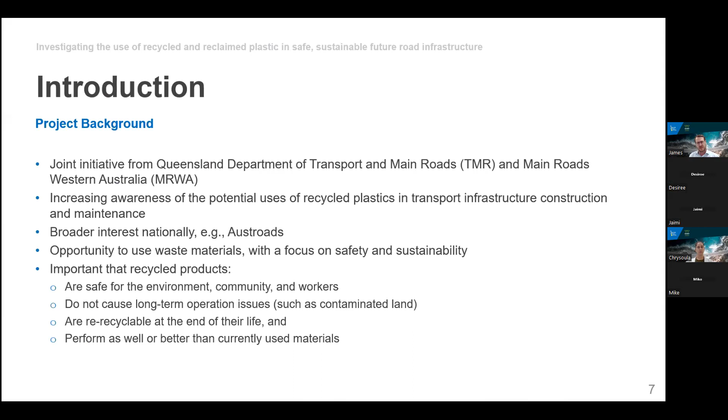Just a quick introduction to this project. As mentioned by Desiree, it's a joint initiative from Queensland Department of Transport and Main Roads Western Australia under the auspices of NACOE and WARRIP. It's to try and increase the awareness of potential uses of recycled plastics in transport infrastructure, construction and maintenance.

It has a broader interest nationally. Many of you will know that Austroads has also been looking at the use of recycled plastics in certain applications. The work is to try and create opportunities to use waste materials, but also to focus on the safety of doing so and also some sustainability aspects.

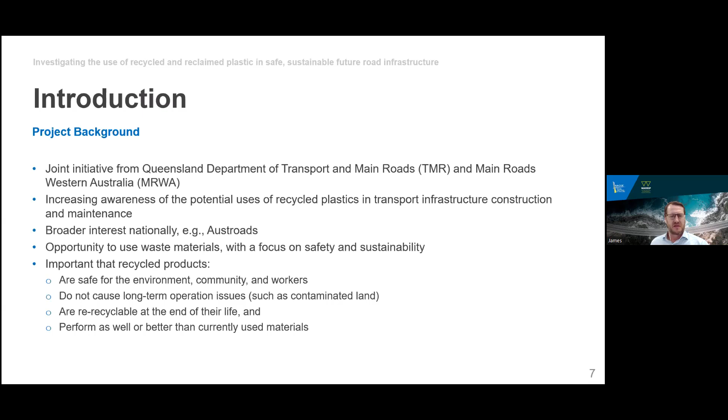And as with all recycled products, it's important that they are safe for the environment, community and workers, do not cause long-term operational issues such as contaminated land, and that they are fully recyclable at the end of their life. They also need to perform at least as well, if not better, than the currently used materials.

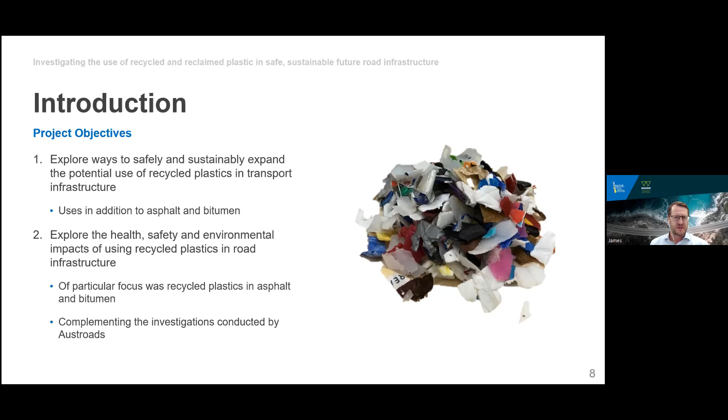So in terms of this particular project, the objectives were to explore ways to safely and sustainably expand the potential use of recycled plastics in transport infrastructure. So it looks at a number of potential applications in addition to asphalt and bitumen, but also touching on that aspect too. It explores the health, safety and environmental impacts of using recycled plastics in road infrastructure, both in standalone applications, but also a particular focus on the use of recycled plastics in asphalt and bitumen. And this work was carried out to complement the investigations that were conducted through the Austroads work.

So what we're presenting today is part of a much larger project. The initial stage 1 was looking at reviewing waste plastics in road infrastructure, where they could be used. It also assessed waste streams in both Western Australia and Queensland and looked a little bit about the recycling and covered a review in terms of desktop from a health, safety and environmental impacts perspective.

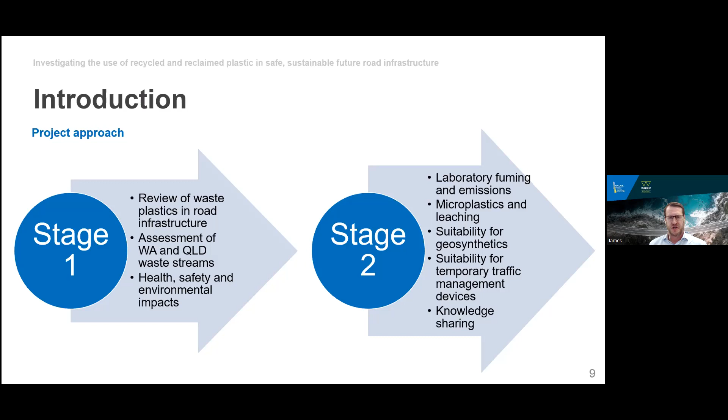We're mainly covering the work that's been carried out in stage 2. So we're talking about covering laboratory fuming and emissions, the potential for generation of microplastics and leaching from recycled plastic modified asphalt, and then also the suitability of recycled plastics for use in geosynthetics and also their use in temporary traffic management devices. And this webinar forms part of the knowledge sharing that is associated with stage 2.

And just one note, due to the size and complexity of the plastic streams in Australia and the potential recycled plastics problem in Australia, no single application for using recycled plastics in road infrastructure is going to make a difference on its own. So we need to consider a number of different applications in our research to make any impact on the annual waste plastic stream. So we're not talking about just utilizing it in recycled plastic modified asphalt, but in any number of different applications. And that little schematic shows that...

So it's a very complex problem, and multiple applications need to be looked at, but also multiple industries need to be involved to tackle the waste plastic problem as a whole.

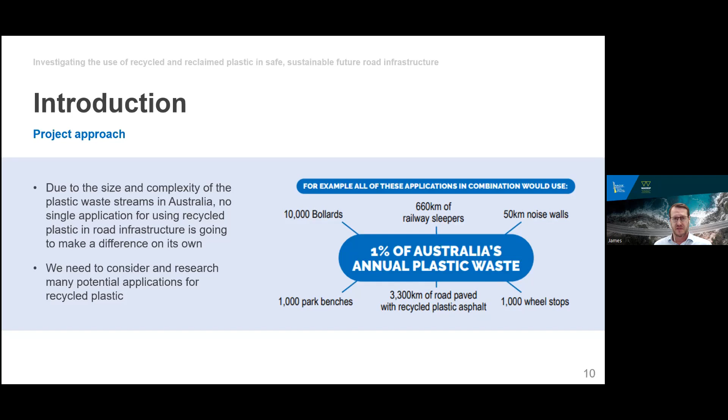The next thing I'm going to talk about is the potential use of recycled waste plastics in geosynthetics. First, a quick introduction to geosynthetics. I'm talking about things like geotextiles for supporting sprayed seals, geogrids for use in pavement structures or embankment structures, and also geonets that could be used in geotechnical applications.

The first thing to note is that there's nothing in the specifications to suggest that recycled plastics can't be used in these applications. As far as we can tell, all of the specifications around these types of products are performance based, so as long as performance and durability requirements are met, there's no reason why recycled plastic products can't be used. The health, safety and environmental risk profile is not expected to differ from virgin plastic products, and a lot of these products already exist on the market containing virgin plastics and are employed on our road networks.

The typical waste plastic streams that some of these products could target are polyethylene terephthalate (PET), polypropylene and high density polyethylene, again dependent on the properties required for the given geosynthetic product. There are some products that already meet current specifications available on the market, presenting potential opportunities for their use in both Western Australia and Queensland. It's also noted that the relevant plastics for the production of these geosynthetics are already being recovered and processed in both WA and Queensland.

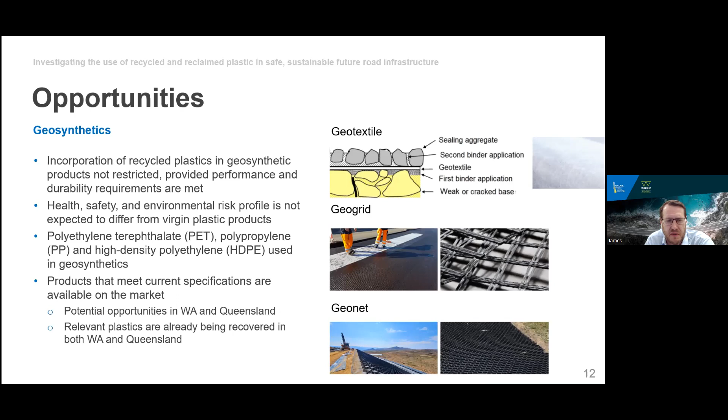Obviously, there are a few barriers at the moment to widespread implementation. I guess the first is production costs. Secondly, making sure that we have a consistent quality of feedstock, and this has been seen as a particular issue in Australia with regards to the maturity of the recycled plastics processing industry in Australia.

So there are a few geosynthetics on the market in Australia, some of which are utilizing Australian recycled plastic. Some of them are currently made overseas. However, it should be noted that a lot of geosynthetic products, even the virgin ones, tend to be imported from overseas at the moment. In terms of performance, the major concern around recycled plastic products is whether they could meet the long-term creep performance requirements in some applications.

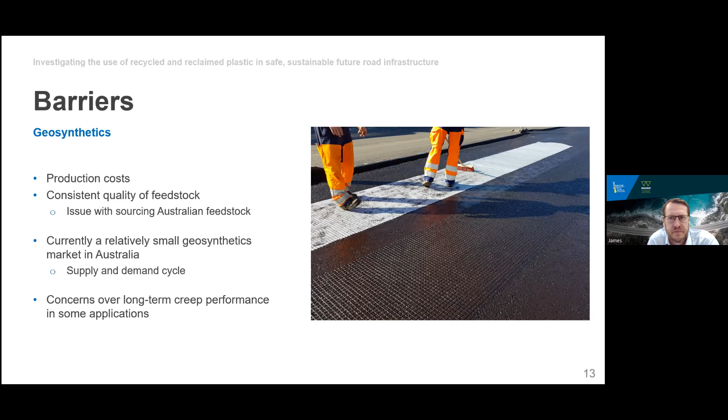The next thing I'm going to talk about is the potential use of recycled waste plastics in temporary traffic management devices.

Again, this provides us with a number of different opportunities for utilizing recycled and waste plastics. There's a number of different temporary traffic management devices that exist containing plastics, such as road cones, barriers, bollards and posts, wheel stops, rumble strips, speed humps. Again, there's a number of different plastic types currently utilized in the typical virgin products, so PVC (polyvinyl chloride), polypropylene again, low density and high density polyethylene.

I've already covered a number of different applications. Again, the health, safety and environmental risk isn't expected to differ much from that of virgin plastic products, so we're considering products that are standalone plastic products where the virgin equivalents are already used.

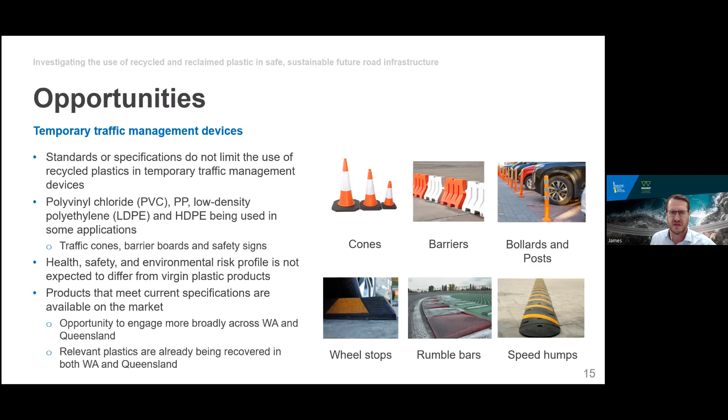Again, there's a few barriers that have been identified. One is the colouring of recycled plastic materials. It's potentially a little bit more complicated to achieve very bright colours, such as bright oranges in traffic bollards or traffic cones. Not impossible, just needs a bit more effort. Again, that requires a good quality of feedstock, and that's just a general comment about processing anything with recycled plastics.

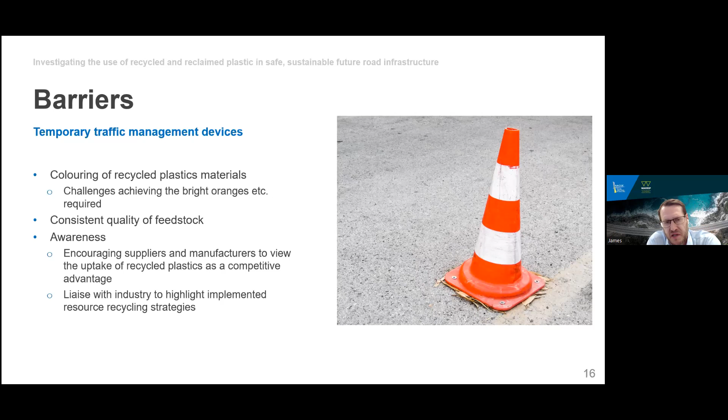It seems one of the barriers to utilizing more recycled plastics in temporary traffic management devices is just awareness that there are products currently being manufactured with certain components of recycled plastics, or even very high percentages, but often people aren't aware they exist. So it's an opportunity to encourage suppliers and manufacturers to potentially use recycled plastics to give themselves a competitive advantage. Then they can market these products to improve uptake, and there are opportunities to liaise with industry.

As introduced earlier, the incorporation of recycled plastics in bitumen and asphalt may also be of interest. Before we recommend their incorporation, we need to understand whether they are safe for operators. We assessed the fumes and emissions in a laboratory environment where concentrations would be greatest, conducting a comparative analysis between bitumen and asphalt containing recycled plastics and commonly used materials, in an enclosed chamber for binders only, and in the laboratory with in-person and static measurements for both binders and asphalt. We then evaluated these measurements against the Safe Work Australia limits and those recommended by the Australian Institute of Occupational Hygienists.

We undertook measurements for volatile organic compounds, polycyclic aromatic hydrocarbons, aldehydes, total suspended particles, and bitumen fumes.

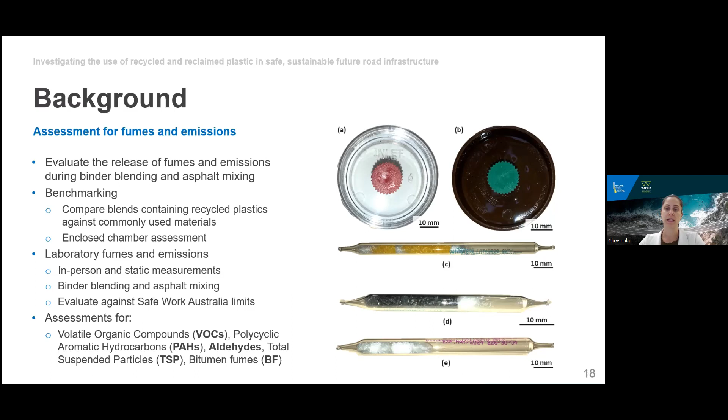For our investigations, we used C170 as the base bitumen, modified with the commonly used EVA and SBS, and two types of recycled plastics: a low-density polyethylene from waste plastic bags, pelletized and sourced from Western Australia, and a commingled plastic of high-density polyethylene and polypropylene in its as-shredded form, sourced from Queensland.

We prepared four blends, plus the unmodified C170, which we then used to compact five slabs via the wet method, and made another two slabs adding the plastics through the dry method.

For simplicity, we discuss the wet method, where additives and modifiers are incorporated during binder blending before mixing with aggregates, and the dry method, where additives are incorporated with the aggregates during asphalt mixing. We recognize a third method, referred to as the hybrid or mixed method, similar to the dry method except the added polymers are expected to melt or soften during processing. The added plastics in this research did not replace any aggregate portion in the asphalt mix. In total, we assessed five materials during blending and seven during asphalt mixing.

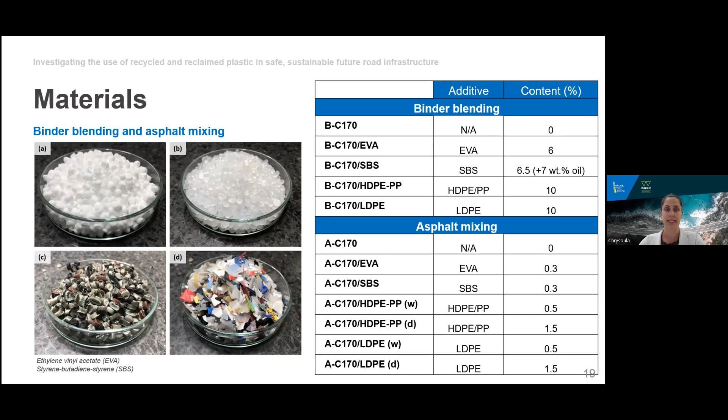Here is the setup for measurements in the enclosed chamber, using a five-neck flask containing 500 grams of material placed in a heating mantle. The temperature was controlled at 180 degrees plus or minus 10, with continuous monitoring via a thermocouple inserted into the bitumen, which was continuously agitated using a low shear mixer.

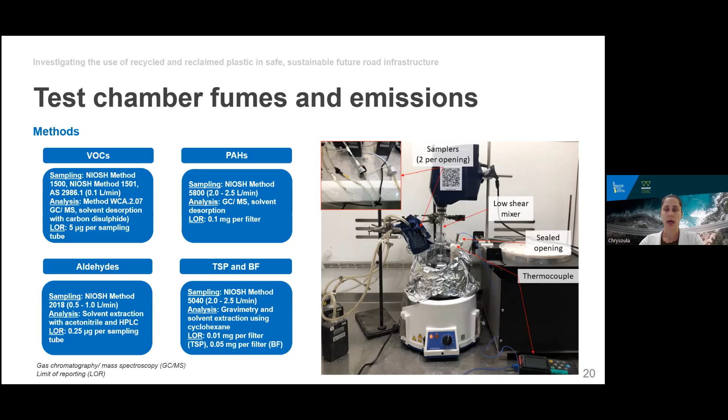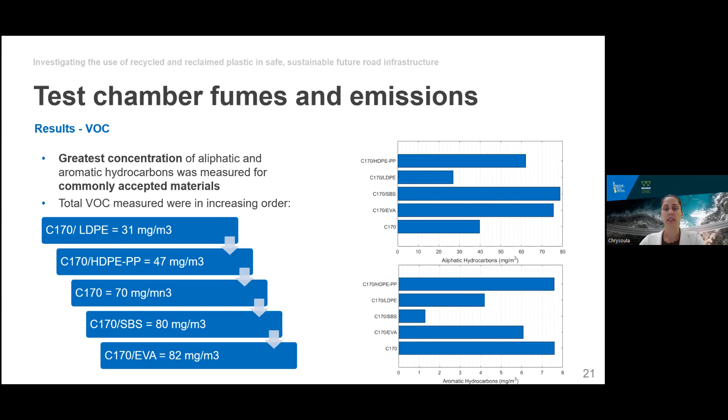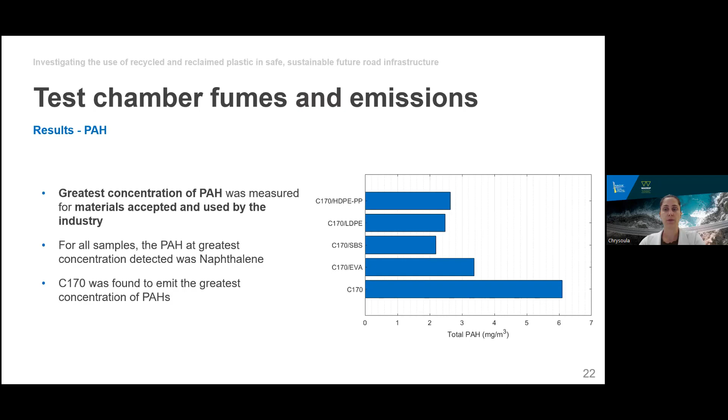For volatile organic compounds, the greatest concentration of both aliphatic and aromatic hydrocarbons was measured for commonly used materials. C170 modified with SBS and EVA emitted the most aliphatic hydrocarbons, while C170 emitted the most aromatic hydrocarbons, marginally more than C170 modified with commingled plastics. In increasing order of total VOC emissions from the enclosed chamber tests, plastics-containing binders emitted the lowest concentrations, while EVA-modified C170 emitted the greatest. C170 and EVA-modified C170 also emitted the greatest concentration of PAHs, with C170 almost double that of EVA. Irrespective of binder, the PAH most detected was naphthalene.

For aldehydes, we detected formaldehydes and acetaldehydes. The greatest concentration of acetaldehydes was from the commonly used EVA-modified C170, while LDPE-modified C170 emitted the greatest concentration of formaldehydes.

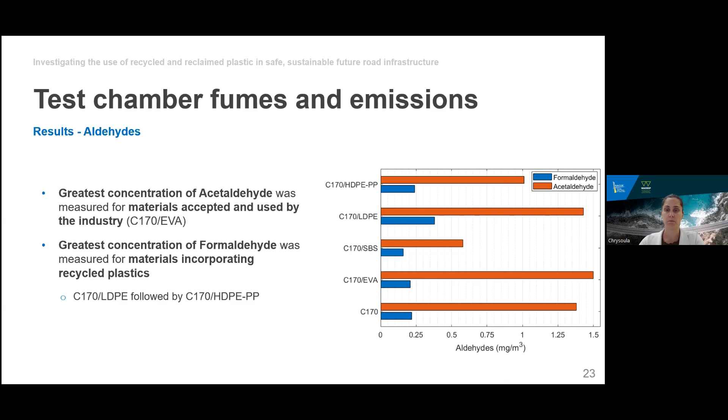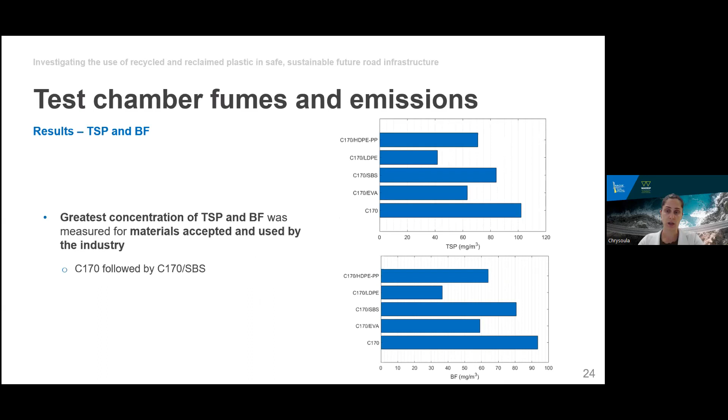C170 was also found to release the greatest concentration of total suspended particles and bitumen fumes, followed in both cases by the SBS modified binder. Overall, emissions from recycled plastics modified C170 at temperatures as high as 180 degrees Celsius were comparable to those of commonly used materials when measured in an enclosed chamber.

The same NIOSH methods were used for the acquisition and analysis of fumes and emissions from binder blending and asphalt mixing activities for the in-person and static measurements. In the photos to the right, you can see the position of the samplers, but in the case of asphalt mixing, the static sampler was moved near the operator's working space around the laboratory.

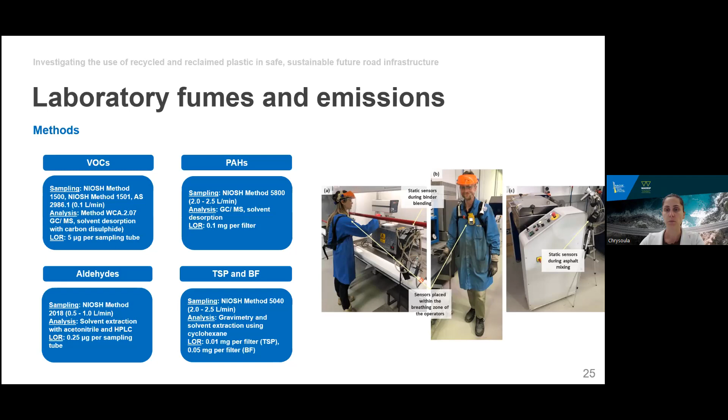In some cases, the VOCs measured by the incorporation of recycled plastics were greater than those of the conventional materials. These were primarily measured during the asphalt mixing activities. For example, the wet mix using the binder modified with HDPE and polypropylene emitted the greatest concentration of aromatic and aliphatic hydrocarbons as measured by both the static and in-person samplers, compared to asphalt mixing using conventional materials.

Importantly, all the total VOCs measurements were significantly below the time-weighted average as recommended by Safe Work Australia. In the worst-case scenario of VOCs emitted during the wet asphalt mixing of HDPE containing binder, the total VOCs were at 0.1% of the Safe Work Australia limit.

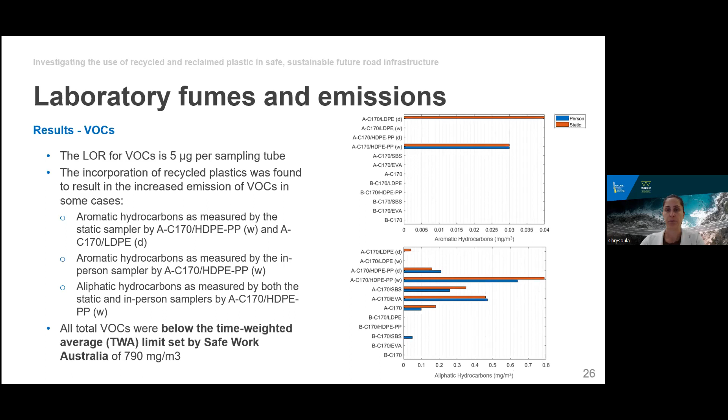In the case of PAHs, the incorporation of recycled plastics was not found to result in the emission of naphthalene or other PAHs at concentrations greater than those emitted by the commonly used materials. Naphthalene is the only PAH for which Safe Work Australia has set an upper exposure limit.

The naphthalene emission of EVA modified binder, which was found to emit the greatest amount according to the static sampler, was found to be 0.08% of the set limit by Safe Work Australia.

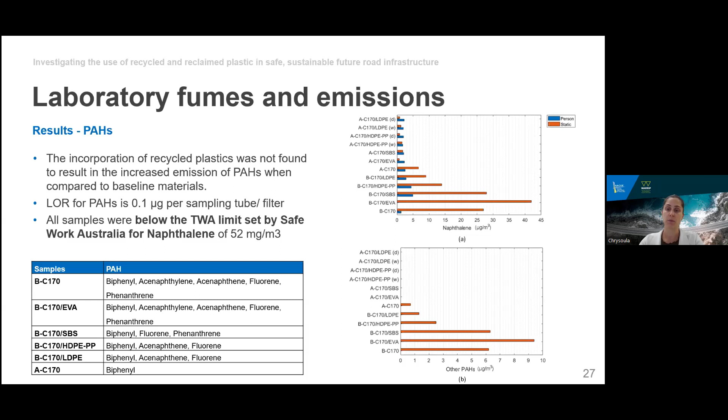In some cases, the emission of aldehydes, specifically formaldehydes and acetaldehydes, from the samples containing recycled plastics exceeded those of conventional materials. In all cases, however, those were found to be below the limit set by Safe Work Australia. The greatest concentration of formaldehydes was emitted by the EVA modified binder as measured by the static sampler, approximately 1.3% of the allowed limits, and for acetaldehydes emitted by LDPE modified binder, which was at 0.03% of the allowable limits.

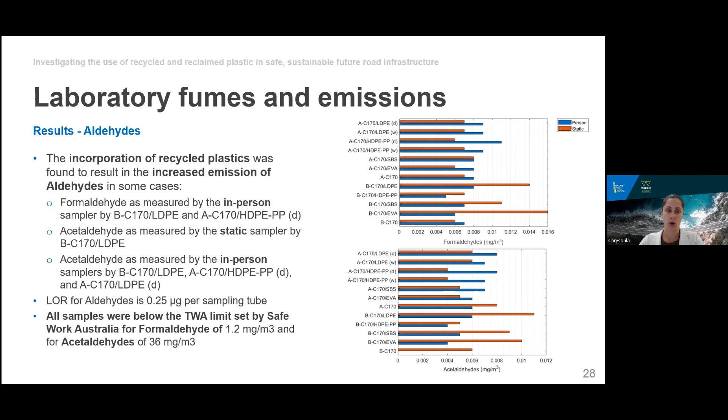All bitumen fumes were below the detection limit of 0.05 milligrams per filter. The incorporation of recycled plastics was found to result in the increased release of total suspended particles in some cases. Safe Work Australia has not set an upper limit for total suspended particles.

However, the Australian Institute of Occupational Hygienists recommends that workers are not exposed to more than 5 milligrams per cubic meter in a working day. For the graph to the right, it is evident that even at their highest concentration, detected by the in-person sampler during the dry asphalt mixing of HDPE polypropylene, the measured emission was 19% of that limit.

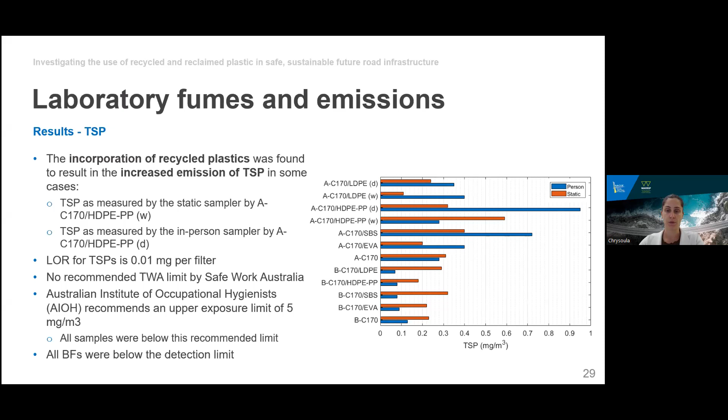Following these trial methods, we were able to put forward an assessment protocol, which would allow for an initial benchmarking activity using the enclosed chamber method, and a method for the assessment of fumes and emissions in a laboratory environment as experienced by operators and others potentially working near these workstations, which can be assessed against Safe Work Australia limits.

As a first step, baseline material and binders containing recycled plastics can be comparatively assessed in an enclosed chamber. The temperature of 180 plus minus 10 degrees, which is typical for blending polymers in the laboratory, is recommended here, even for the base bitumen, just for a better comparative analysis.

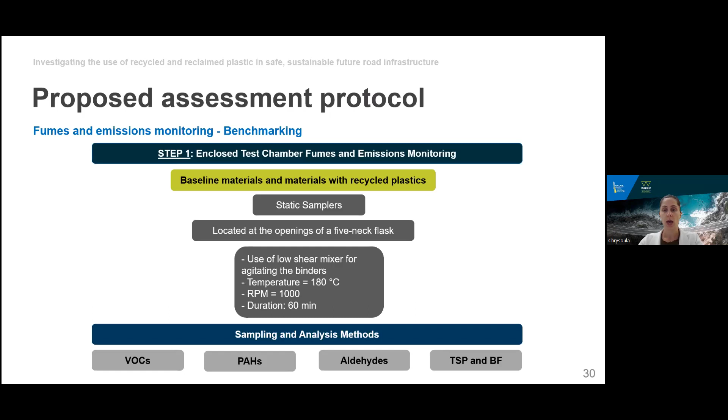We found that all target fumes and emissions could be assessed this way, although we do recognize limitations relating to oxygen flow and availability within the chamber.

Following the initial comparative assessment, a more comprehensive assessment of fumes and emissions as emitted in the laboratory environment can then be undertaken, specifically in cases where the results from the step 1 assessment for newly introduced materials exceed those of baseline materials. As we discussed earlier, the enclosed chamber results are not representative of the operator's exposure to fumes and emissions.

Therefore, in cases where they are found to be greater than the benchmark materials, their assessment using static and in-person samplers could provide results that can then be compared to Safe Work Australia limits, ultimately deeming them safe for use or not.

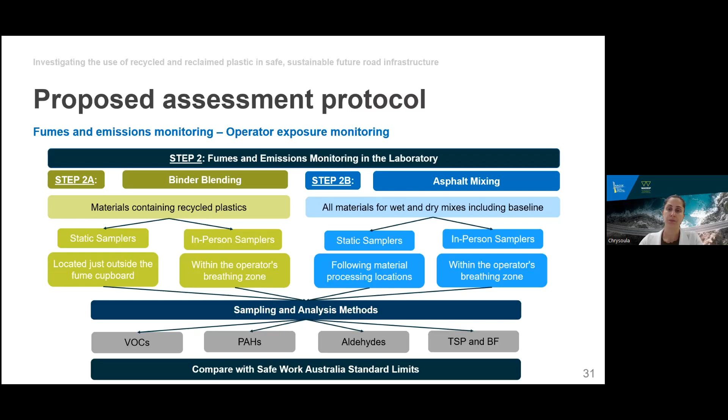In addition to worker safety, the impacts to the environment were also needed to be assessed. In this research, we considered the potential release of leachates and microplastics.

In this section, we discuss the methods we used for the assessment of leachates and microplastics. We tried three different methods to measure leachates: one assessing the binders before mixing with aggregates, and a couple using a loose asphalt mix—one where we crushed the coated aggregates to size, and another where we selected only the appropriate sized aggregates without crushing them. As far as microplastics were concerned, we considered methods for both their qualification and quantification.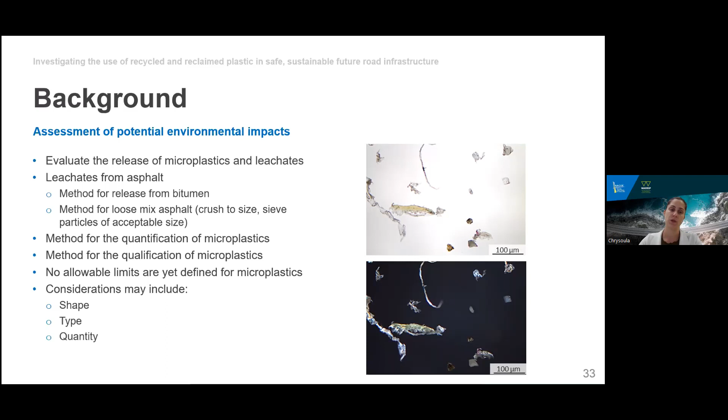To prepare the binders, we used a high shear mixer at 4,000 RPM. The binders were kept at 180 plus minus 10 degrees Celsius for 1 hour under a blanket of carbon dioxide to prevent oxidation. We then used these binders to prepare 7 slabs: one using unmodified C170, and 2 more via the dry method incorporating recycled plastics, as mentioned earlier. For a worst case scenario, we also subjected the prepared slabs to thermo-oxidative aging following the AASHTO R30 method.

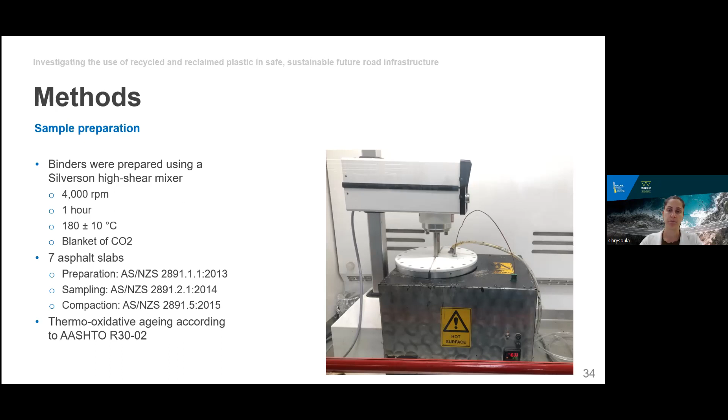To assess the potential release of leachates, we tried a couple of different things. Firstly, we assessed leachates from the binder using a method similar to what was described by Greg White. We submerged the binders in deionized water, covered with aluminium foil, and agitated using a magnetic stirrer at ambient temperature. Then we placed them in the oven at 40 degrees Celsius for 18 hours, and repeated that agitation process for another hour.

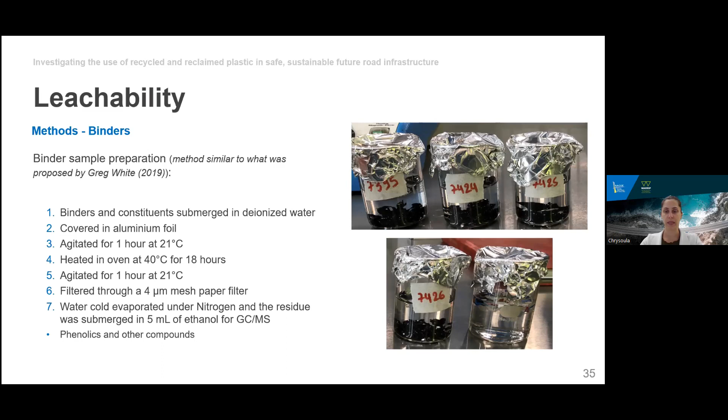Once we finished with the exposure, we filtered the potentially contaminated deionized water through a 4 micrometer mesh filter. The water was then cold evaporated under nitrogen, and the residue was submerged in 5 milliliters of ethanol and prepared for GCMS.

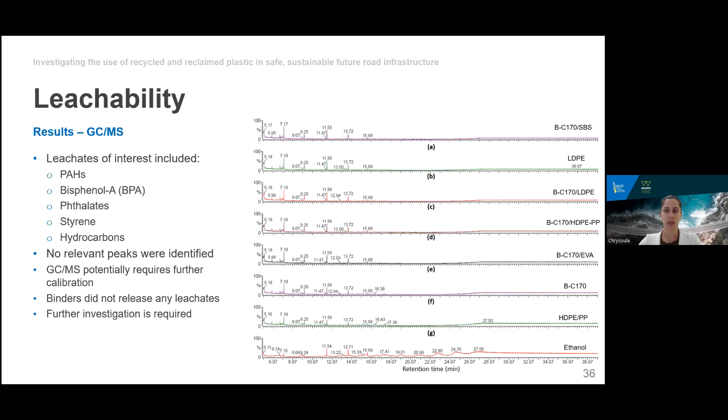We were interested to see whether any peaks for PAHs, bisphenol A, phthalates, styrene, and hydrocarbons could be detected during this process. But as you may see in the results to the right, we did not identify any peaks different to those of ethanol in any of the samples.

We also tried to assess the loose mix asphalt for leachates using the Australian standard leach procedure. This method is commonly used to measure leachates in soil. We tried this method both by crushing our loose asphalt mix to size, which I'll refer to as crushed, and by sieving the loose asphalt mix to include only those of acceptable size, avoiding crushing, which I'll refer to as uncrushed. We then assessed for metals, phthalate esters, VOCs, PAHs, phenolics, and other polar compounds.

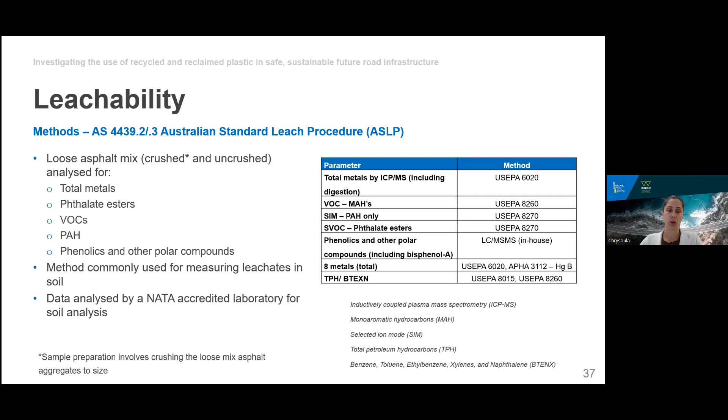Before I present the results, I need to say that I will talk a lot about groundwater investigation level, abbreviated here as GIL. According to the National Environmental Protection Measure, this is the level above which further investigations are required before they are deemed safe for the environment.

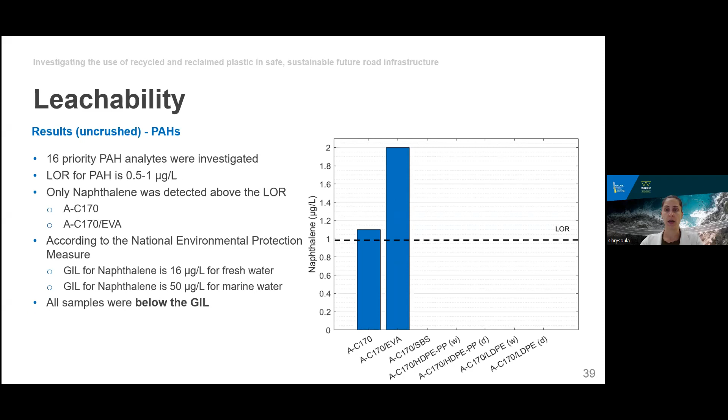Looking at the results for PAH leachates from a crushed loose asphalt mix, only those of C170 and EVA modified C170 were above the limit of reporting, and all were below the groundwater investigation level. The results from the uncrushed loose asphalt mix were the same as those of the crushed sample as far as PAHs were concerned.

For the crushed samples, water leachable metals—namely aluminium, nickel, and zinc—were all detected. Nickel and aluminium were all at or above the groundwater investigation level for fresh water. These metals have previously been associated with quarrying activities, so we suspect they were detected due to the presence of aggregates in the sample.

Also, C170, EVA modified C170, and plastics modified samples via the dry method were found to release nickel at concentrations above the fresh water and marine water groundwater investigation level, and at the drinking water limits. EVA modified C170 and LDPE modified C170 via the wet method were also above the groundwater investigation level for zinc.

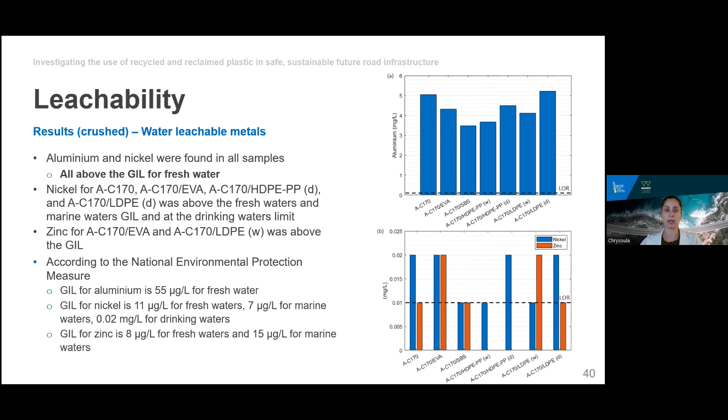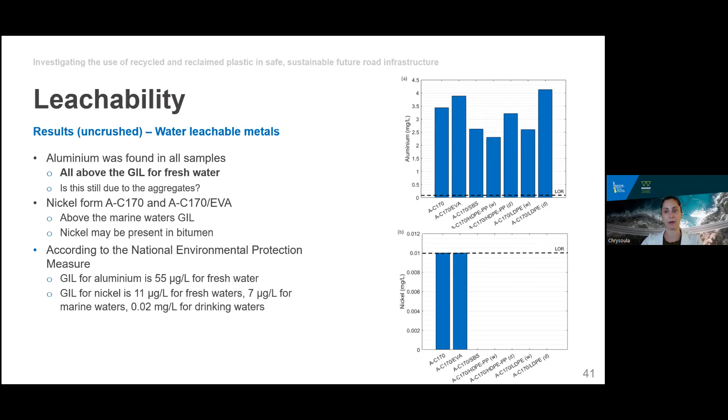The results changed when uncrushed loose mix asphalt was assessed. In this case, zinc was not detected above the limit of reporting for any of the samples. Aluminium was still present in all samples and in all cases above the groundwater investigation level. Nickel was also still detected for C170 and EVA modified C170, in both cases above the groundwater investigation level for marine waters. We understand that nickel can sometimes be present in bitumen.

Since we were able to detect leachates such as aluminium, which is not expected to be present in the bitumen or any of the additives, both in the crushed and uncrushed loose mix asphalt, we cannot confidently say that the method can exclude the effects of aggregates. Therefore, we conclude that a method for investigating the binders before they're mixed with the aggregates is potentially more suitable. We note that the method described here did not bring forward any relevant readings—this could either be because no leachates were present in the samples, or because the method was not calibrated to the analytes of interest. We feel that this method still warrants further investigation.

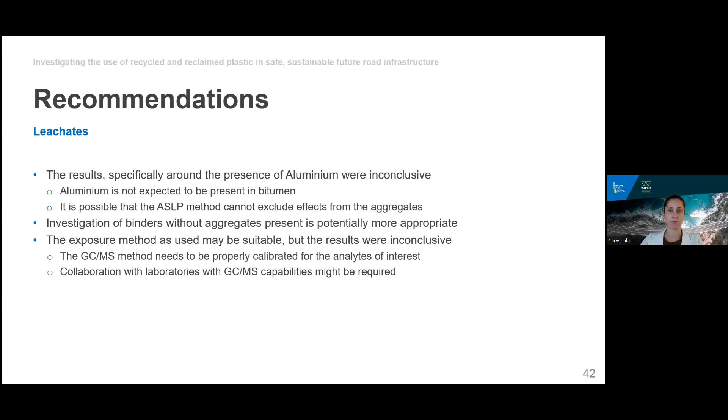Now, to understand the potential release of microplastics by the manufactured and aged asphalt slabs, we use the custom-developed abrasion device to abrade the surface for 1 hour.

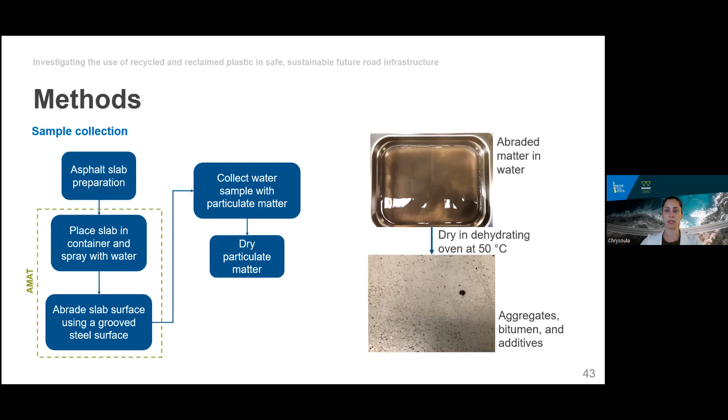The water was then evaporated in a dehydrating oven at 50 degrees Celsius, and the particulate matter was collected. As only particles smaller than 5 millimeters can be classified as microplastics, the particulate matter was sieved and only particles of smaller size were used for this analysis.

To quantify the microplastics in the particulate matter, we used thermogravimetric analysis. This method analyzes between 5 to 10 milligrams of the sample of interest. The specimens are heated at the selected rate under an atmosphere of choice.

Here we used a heating rate of 5 degrees Celsius per minute for high resolution measurements, at the region of interest, which was between 250 and 550 degrees Celsius, and an inert atmosphere.

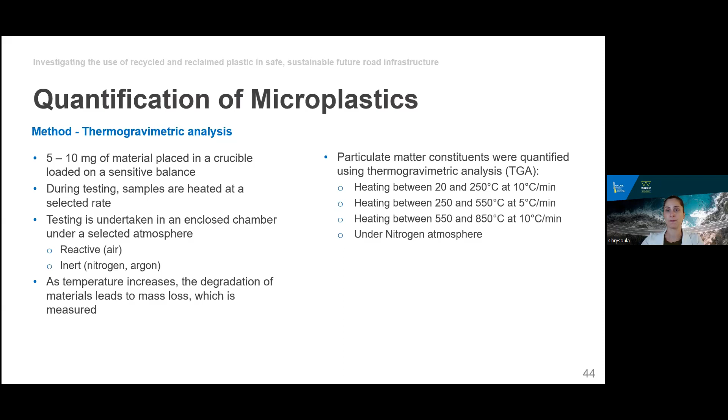For this analysis, we assume that the binders used do not segregate, as this is the requirement for national and state specifications. Therefore, even though the degradation regions of the C170 and additives overlapped, we could calculate the concentrations of plastics based on their concentration in the blend.

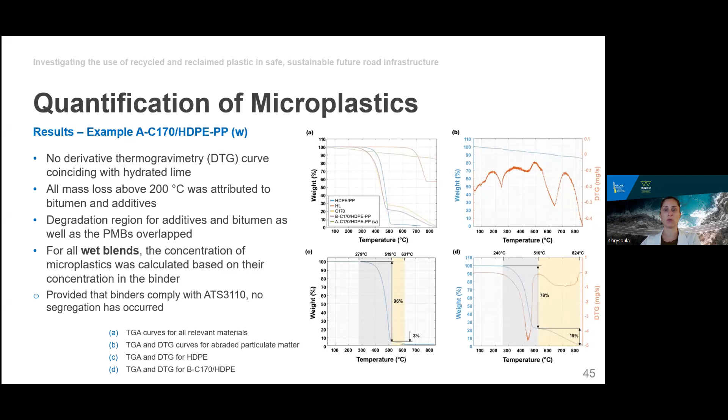For the dry blend of HDPE and polypropylene, which did not soften during the mixing process, we were able to measure the concentration of plastics directly, as you can see in the figures to the right here.

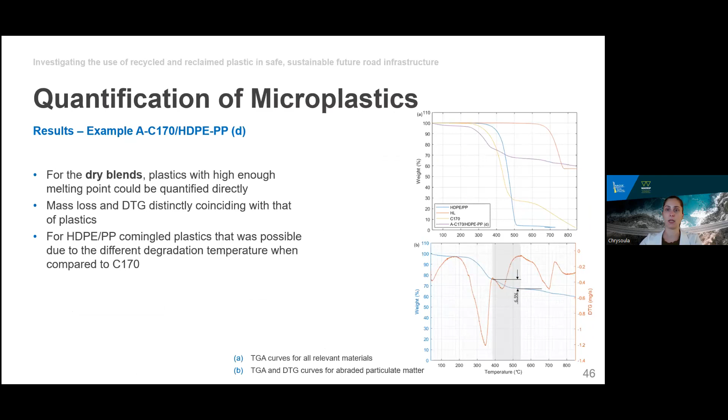Overall, most of the abraded matter was found to comprise aggregates, followed by bitumen. The concentration of microplastic was found to be dependent on their concentration in the blend.

So the concentration of microplastics from blends modified with LDPE and HDPE polypropylene were found to release more microplastics. However, we need to note that their concentration in the blend was 10%, which was greater than that of the SBS and EVA in the respective blends.

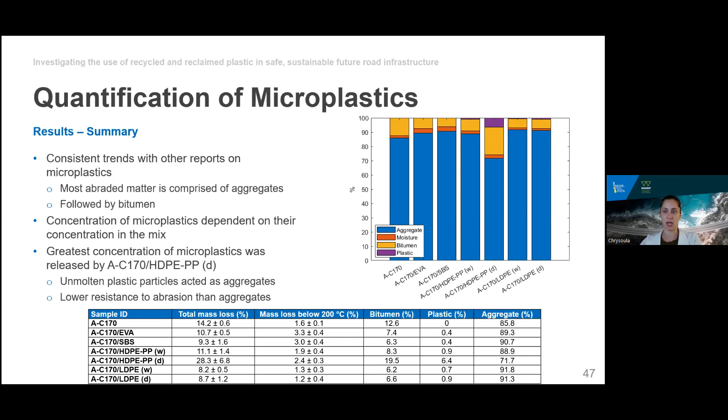The way in which microplastics affect the environment has not yet been conclusively defined. Therefore, even though their quantification was important, it was thought that finding methods for the qualification was also necessary.

In this method, we took the dried abraded matter, dissolved the bitumen using low-odor kerosene with magnetic stirring, and filtered the solution until clear. Then we used glycerin to separate the aggregates from the microplastics via density separation. Finally, the floating microplastics were collected using a pipette.

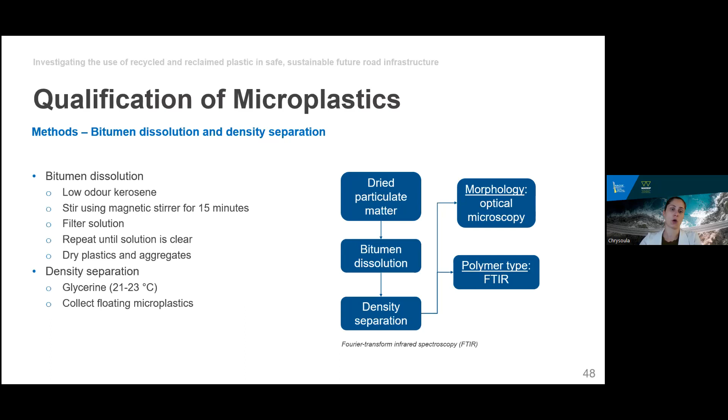The microplastics from this method could then be analyzed for morphology using optical methods, and polymer type using spectroscopic methods. We found that the method could successfully dissolve bitumen for most samples.

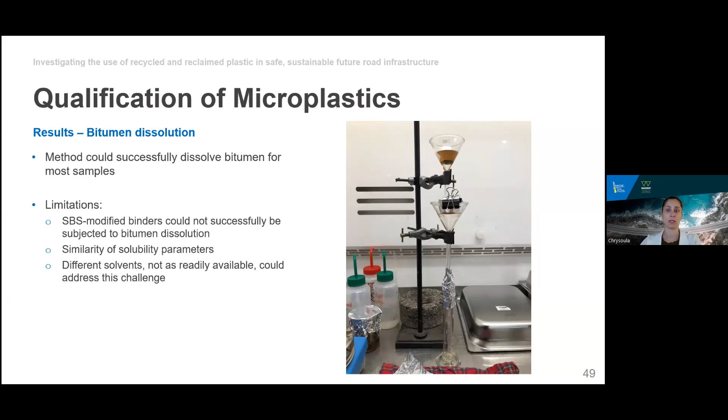SBS modified binders were an exception due to the similarity of its solubility parameters with bitumen. For SBS, a different solvent or combination of solvents could address this challenge. However, we wanted to assess the method using solvents readily available in a bitumen laboratory, and that was just for this exercise.

We could also successfully collect microplastics from the solution following density separation, which could then be analyzed under an optical microscope, for example. Using this method, however, we were also collecting fines that remain floating on the surface, possibly due to surface tension. So when looking under the microscope, we need to be careful that what is analyzed is indeed microplastics. Methods such as polarized lenses or UV light, among others, could help with this. In addition, the floating microplastics were invisible to the naked eye, so collection needed to be confirmed throughout.

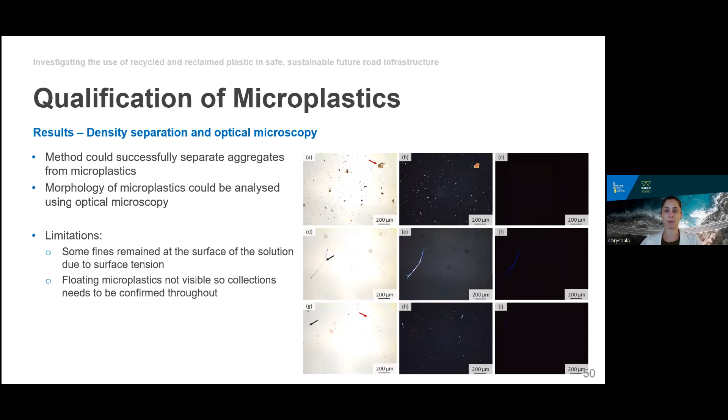Following this assessment for microplastics, we were then in a position to recommend a protocol for their assessment. This protocol involves avenues for both their qualification and quantification.

As limits for microplastics have not yet been set, it is recommended that the release of microplastics from recycled plastic modified asphalt is compared against commonly used materials. It is also proposed that the slabs are assessed after simulated aging, either thermooxidative or UV or both.

The abrasion duration can be tailored to the amount of material required. However, we found a minimum of 1 hour to be suitable to remove a sufficient amount of material, and that was also creating a surface similar to that of an aged road.

For the quantification of microplastics, thermogravimetric analysis was found appropriate. Due to the small amount of material analyzed per specimen by this method, a minimum of 3 specimens should be considered per sample group, and their average should be reported.

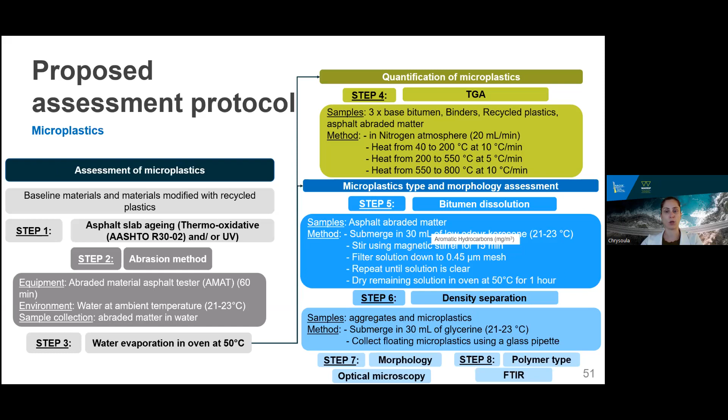Bitumen dissolution and density separation can then be used on the remaining abraded matter in order to assess the morphology of the released microplastics and find the type of plastics present.

So now I'm just going to cover a bit about the expected performance of recycled plastic modified asphalt. First of all, it's important to say that this work was a desktop comparison between published results available around recycled plastic modified asphalt, where possible, undertaken using Australian Road Authority test methods. It was to try to give us an idea of where Australian state road authorities could potentially utilize recycled plastic modified asphalt.

So I guess the focus is understanding where they, or what mixes they're presently using, for example in terms of wearing courses on highways and freeways, or what they're doing in terms of asphalt base courses. Just to put Western Australia and Queensland into context, typically in their asphalt wearing courses they would be using SBS modified asphalts in dense graded asphalt, in stone mastic asphalt, and open graded asphalt mixes. One of the main reasons for this, especially for the dense graded and the stone mastic asphalt, is to get improved fatigue cracking performance.

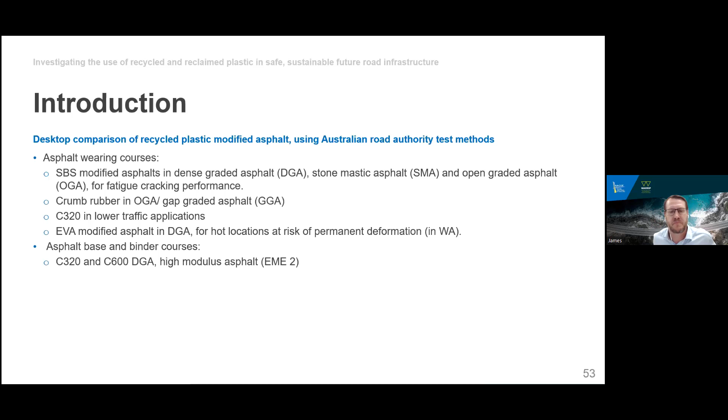Next slide, please, Chrysoula.

So what we're trying to do here is utilize available published data on recycled plastic modified asphalt and compare that with both unmodified asphalt and SBS and EVA modified asphalt, trying to compare the typical performance of recycled plastic asphalt with the typical asphalts that are used in different parts of the pavement structure in both Queensland and WA.

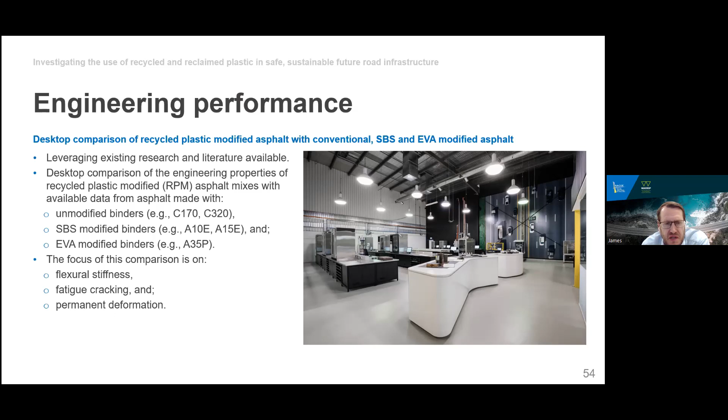So the focus was looking at, obviously, the data available on recycled plastic modified asphalt mixes, but also comparing that with published data on unmodified binder mixes, so C170, C320 binders, or even C600 binders in asphalt; SBS modified binders, so the A10Es, A15Es, and EVA modified binders in asphalt, such as A35P. The focus of this comparison was on flexural stiffness, fatigue cracking, and also permanent deformation of the resultant asphalt mixtures. Next slide, please, Chrysoula.

So the first area of interest was flexural stiffness, and in Australia, typically we would test according to AGPT T274.

One thing is it was quite difficult to do exact comparisons just due to small data sets or slightly different parameters being used in each of the different research. But generally, the recycled plastic mixes were similar or a bit stiffer than unmodified asphalt mixes, unmodified bitumen asphalt mixes, and similar to the stiffness of the SBS type modified mixes, not quite as stiff as the EVA modified asphalt mixes, but again noted that there's very limited use of that type of asphalt in Australia.

One of the reasons why there's such a small data set to compare is that there are a lot of different parameters that could be looked at, many different manufacturing methods and binder sources, and also potentially differences in whether it was laboratory produced mix or field manufactured mix. Another thing to consider is the binder's storage stability when making unmodified, polymer modified, or recycled plastic modified binders for use in recycled plastic modified asphalt.

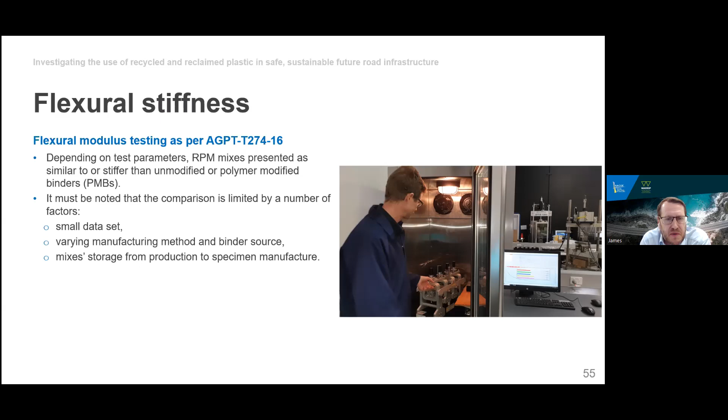Fatigue cracking is obviously of particular interest and probably the major concern when designing a pavement. In this part of the study, we considered flexural fatigue data as per Austroads AGPT T274. The findings were generally that the wet mix recycled plastic modified binder manufactured asphalts had similar fatigue results to unmodified C170 or C320 binders, but were not as resistant to flexural fatigue as some of the high performing polymer modified binder asphalts, so the A10E and the A15E.

Recycled plastic modified asphalt produced through the dry method again presented similar test results to unmodified C320 hot mix asphalt, as might well be expected, given that the recycled plastic incorporated through this method isn't expected to modify the binder properties. There was a suggestion in the data that potentially the recycled plastic modified asphalt might have a higher temperature susceptibility compared to some of the premium polymer modified binder asphalts.

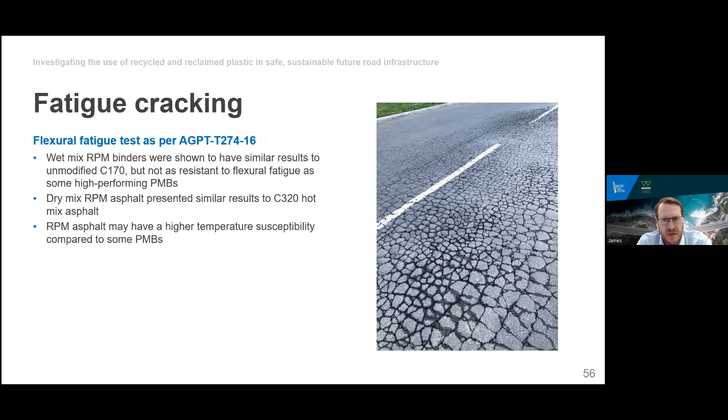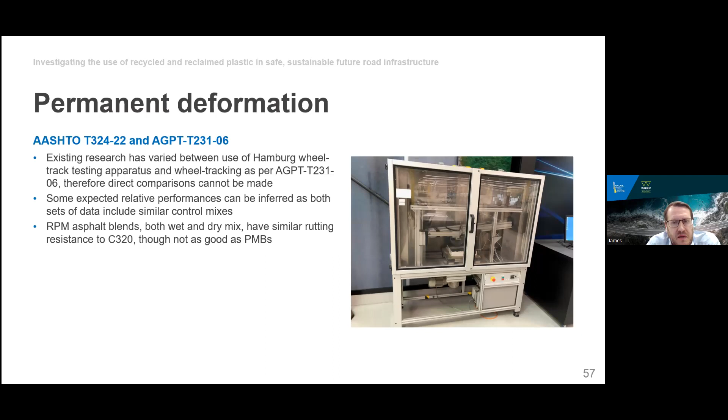I'm just going to run through a few key messages from the performance testing investigation. First, there is still limited available published data sets to allow us to draw firm conclusions. But generally, the recycled plastic modified asphalt appears to have similar properties to typical unmodified asphalts, for example the C320 binder-made asphalt, but not quite as good as the high-performing premium polymer modified mixes, especially in fatigue performance.

Recycled plastic modified asphalt is generally a bit stiffer than unmodified bitumen made asphalt, and the rutting resistance is marginally better. But again, it's not as good as the premium polymer modified asphalt in terms of rutting resistance, and definitely not as good as A35P modified asphalt or the EVA modified asphalts.

Again, recycled plastic modified asphalt seems to have similar properties to unmodified asphalt in fatigue, potentially slightly better in some cases, although there was that question mark about slightly higher temperature susceptibility. However, it doesn't perform as well in fatigue as the A10E and A15E modified asphalt mixes.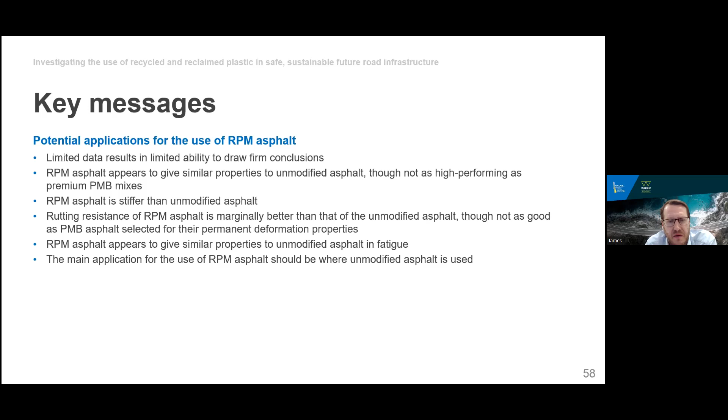The main conclusion from that is that the main application for the use of recycled plastic modified asphalt would be where unmodified bitumen asphalt is currently used, where we can be confident that the recycled plastic modified asphalt would have similar, if not fractionally better, performance than the unmodified asphalt. Next slide. Now just running through a few conclusions and recommendations from this work.

So I guess the first thing to note is that there's obviously a lot of potential applications for the use of recycled plastic. There's a number of other applications we're not considering in this research, partly because that research was already being undertaken in other projects, so we didn't need to investigate it here. Our focus was mainly on areas that hadn't had a lot of research into their use, hence the focus on recycled plastics in geosynthetics.

So there are opportunities to use recycled plastics in geosynthetics, such as geogrids, geotextiles, and geonets. There's also some opportunities to use recycled plastic in traffic management and temporary traffic management devices, such as cones, bollards, wheel stops, speed bumps, safety barriers, and rumble bars.

Most of the limitations are around the recycling industry in Australia, which is still in development, and the availability of enough recycled or recycled processed plastic of the required quality to produce these various products.

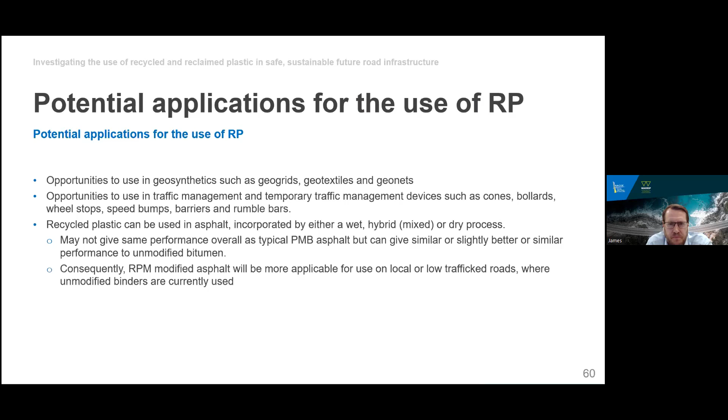So then we focused our attention to laboratory testing on the health, safety, and environmental performance of recycled plastic modified asphalt. As you heard before, some proposed assessment protocols have been developed. Some of those were in fuming and emissions, and for recycled plastic modified asphalt, the fuming and emissions were found to be comparable with conventional asphalt or polymer modified asphalts that are already currently being widely used.

It's recommended that further research be undertaken on leachability, partly because there aren't any suitable test methods to understand the potential for leachability of plastics from bound asphalt applications. Most of the leachability tests are more suited to unbound granular materials, so further research might be required here just to check there aren't any concerns.

However, the potential for the generation of microplastics from recycled plastic modified asphalt was again found to be comparable to that from either unmodified asphalt or polymer modified asphalts that are currently widely used and accepted on our road network.

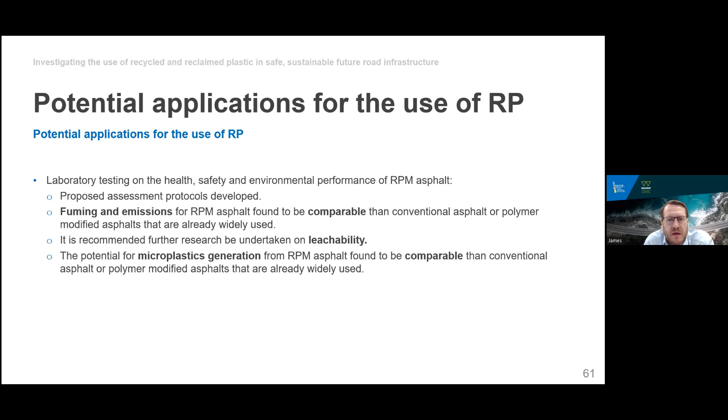I think that now brings us on to questions, so I'm handing back to Desiree to manage this part of the session. Yes, James, I think one of the first questions I might pose is if you could clarify a little bit more about the wet and dry processes and what exactly you were referring to there.

Yeah, thank you, Desiree. So essentially there's three different methodologies for incorporating recycled plastics into asphalt. The first, and probably the one likely to give the best outcome, is a wet process. We're taking lower melt temperature recycled plastics such as low density polyethylene, linear low density, potentially high density polyethylene, and blending that directly with the bitumen to create a waste plastic modified binder that we then use to make our asphalt, in a similar way to a polymer modified binder, adding the resultant recycled plastic modified binder into the asphalt plant to make a recycled plastic modified asphalt.